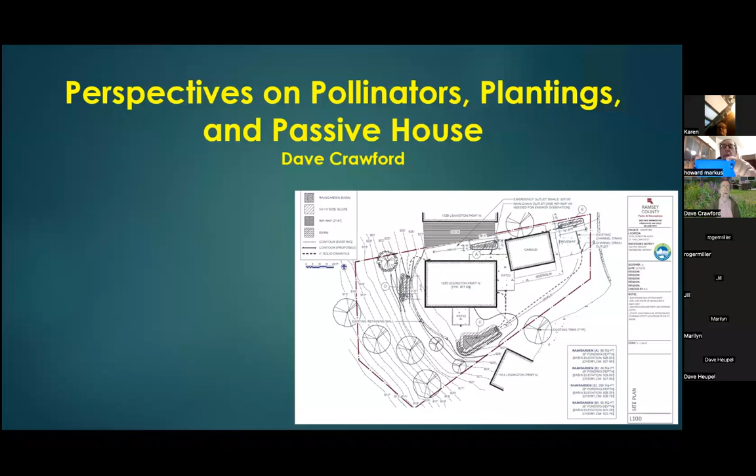The house that my wife and I built, finished building about 3 years ago, has a working name, Lexington Parkway Passive House, and more on that as we go along. I'm also going to be talking about the native plant gardens that we've installed on the property, and in particular the first step of that was installing rain gardens, which was part of the plan from the very beginning.

But then, just last year in the fall, we did an additional project to landscape the slope that runs down to Lexington Parkway. And I'm also going to feature some pollinators. So that's the layout of the talk.

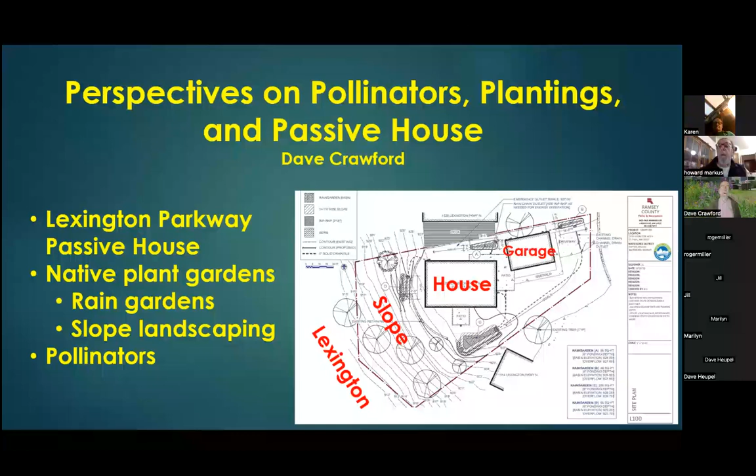Just to give you a layout of the landscape, Lexington Parkway is just at the bottom of the lot, down a hill about 14 feet from the elevation the house is at. That slope is marked here, and the house and the garage are marked, so you get an idea of what the lot looks like. It's pie wedge shaped and offers some really intriguing opportunities for landscaping, and some challenges.

The house itself is unlike anything else in the neighborhood. We were a little concerned about that at first — as we were planning it, were the neighbors going to think it's too garish or too rectangular or too odd? So far, nobody has said that to us. Many people have said, 'Ooh, I really like that fuchsia trim with that green siding,' which kind of confounded our architect, because he thought it might be a little too loud. But he's grown into liking it, and he may feature it as a choice for future customers.

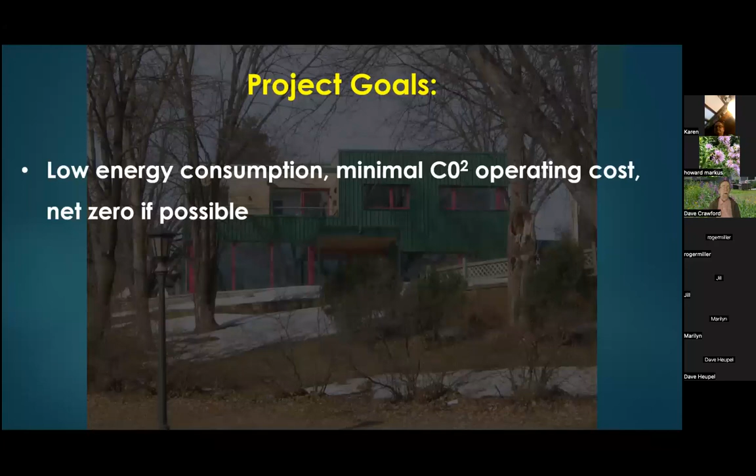As we moved into this project — and I'll tell you a little bit about how we came to be here later — the goals that my wife and I had for this project were primarily: first, low energy consumption, minimum operating cost in terms of CO2 emissions, net zero energy consumption if possible, which is a pretty high standard to meet in Minnesota's climate. We also wanted to design in order to be able to age in place, so the house is designed for as universal accessibility as was prudent for us.

We could have gone way overboard with that, but we had a consultant who said, here are the things you really need, so do these first. We wanted to build the project using materials with reduced environmental impact, so not only would our operating cost be low CO2 emissions and low energy consumption, but the production of the materials for the house should also, as much as possible, meet that goal.

We wanted ample natural light in all of the living spaces, which is easy to do when you have a lot of big windows. We wanted to use materials that were easy to maintain, so ideally, we hope not to have to do any major things like repainting or re-roofing during the time that we live here.

And then outdoors, we wanted the best management for runoff retention. It's especially apparent to me that we should not be building homes and shopping centers and so on in such a way that all the groundwater has to be channeled away into storm sewers and end up in surface waters. We should be retaining as much of that runoff on the site as possible for the good of the site and also for the good of surface water.

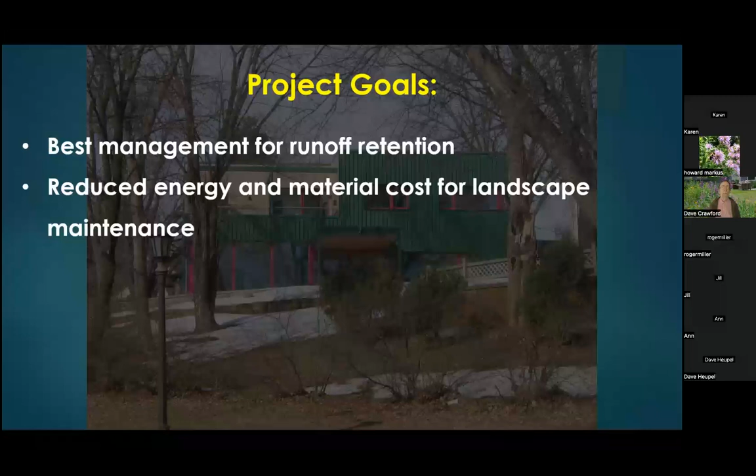We wanted to be able to maintain a landscape with minimum effort in terms of energy, time, and material. We wanted the landscape to be beneficial, not just look nice to us, but provide habitat for wildlife, particularly for pollinators. And overall, we wanted to set a good example for others. We fully intended from the very beginning that part of why we were doing this project was to provide tours and outreach so that other people could see our example and learn from it.

So, definition of passive house. It's a voluntary certification—think of LEED Platinum, for instance—a very high standard of energy efficiency. Passive house calls for reducing the ecological footprint of the building. Passive house compliant buildings have ultra low energy consumption, and the lion's share of energy consumption in this climate especially is space heating and cooling. So passive houses are designed to minimize the cost of doing those things.

There are two organizations that certify passive houses, and they are separate from each other, although the Passive House Institute US is a descendant of the original, the Passive House Institute.

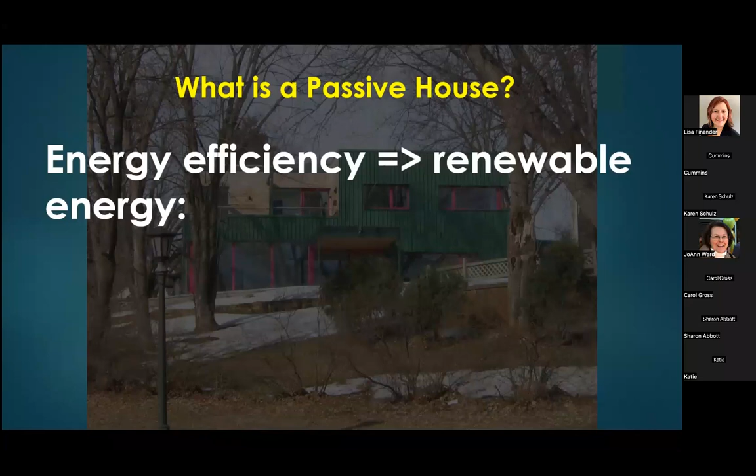The idea is that if you have reduced energy demand, you're going to have a reduced need for energy production, and that's going to have a number of snowball effects. There will be less need to build lots of transmission lines, and less need to occupy the landscape with large facilities for energy production, including solar. If we could reduce the amount of energy consumed in every building, we could get by with a lot less disturbance of the landscape and a lot less carbon problems as well.

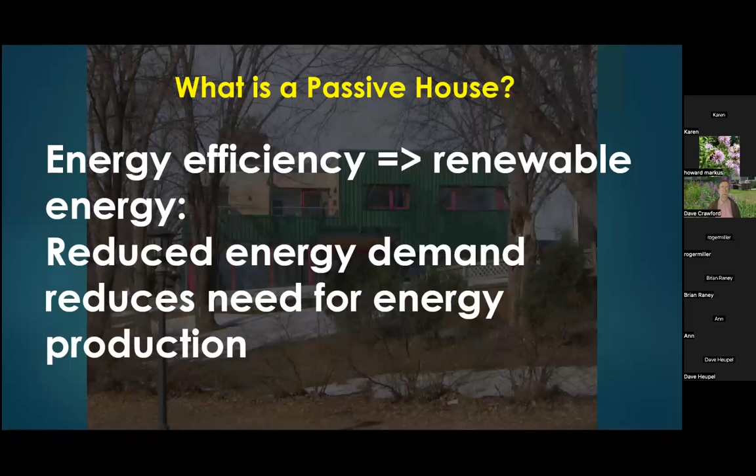So how I got started on this: before I was married, in the 1980s, I was planning a house in rural Wisconsin, which I ultimately built and called Oak House, because the siding, the sheathing, and the subfloors were all made with rough cut oak lumber from a local sawmill. It was remainders, left over from batches that people had not purchased all of the wood. So I got it at a very good price and built a house out of oak for a ridiculously low price per board foot.

In the hard winter, yeah, I did have to heat. So that was my initial experience, and I was very pleased with the results.

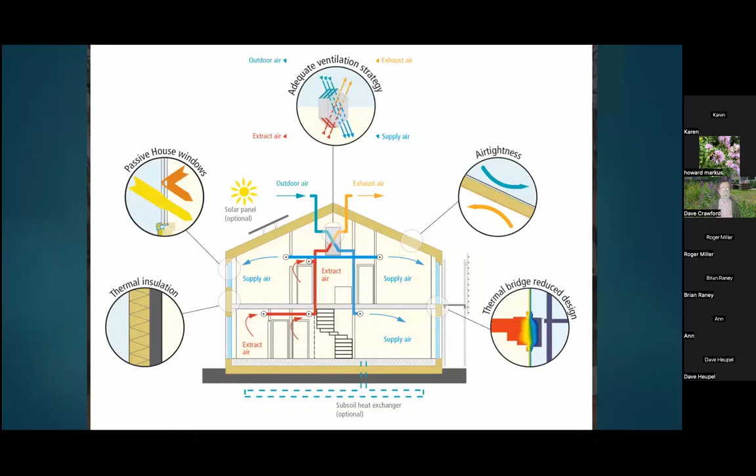So Passive House stands on 5 pretty critical steps: thermal insulation, passive house windows, and so on. But in general, instead of relying on fuel burning heating systems, the idea is to use passive heat gain and to minimize heat loss, or during the hot season, minimize heat gain. So all of those different pieces come together to do that. And I'm going to explain them in a little bit more detail.

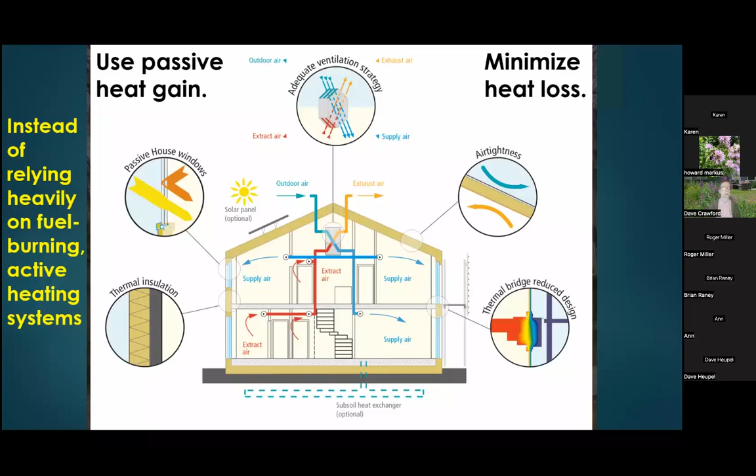But first, around 2011, we were looking for a lot on which we could build, and we were having a hard time.

We wanted to live in St. Paul because we have some connections in St. Paul that are important to us. And it's hard to find a vacant lot in St. Paul. So we started looking at older homes with the idea that if we found one that was a real wreck, we would not feel bad about tearing it down and building something in its place. And what we ultimately found after months and months and months of looking was a house that wasn't a wreck.

It was a 1948 Rambler that was in quite good condition, but it was selling for extremely low cost because of tax delinquency, I think.

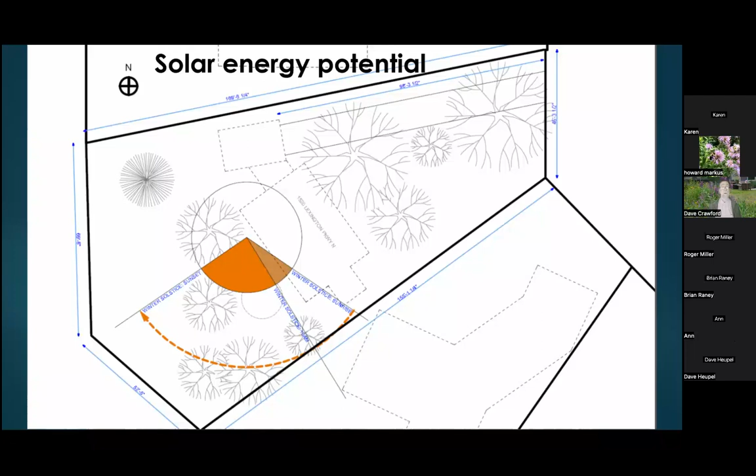And so we invited Tim Ian to come to the lot and give us his assessment of what's the solar energy potential for this location. And he said, it's great. And so we said, all right, let's start planning a house.

And the house is oriented so that the widest face points due south, and solar input through those south windows is extremely effective during the leaf off season. So it fully meets the needs for a house site for a passive house to be able to harvest that passive solar energy.

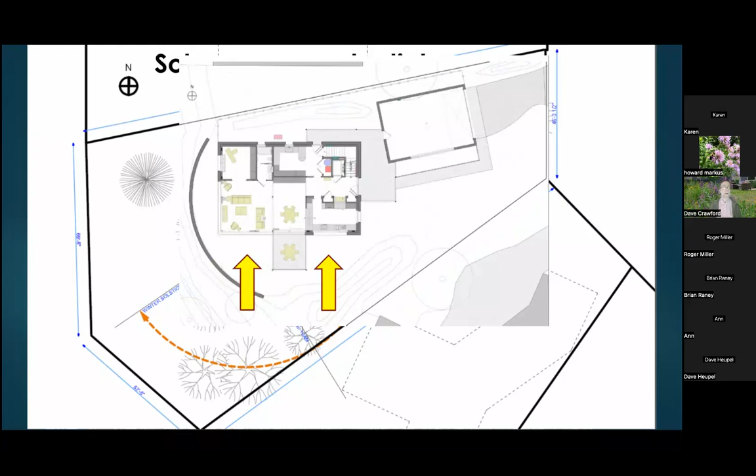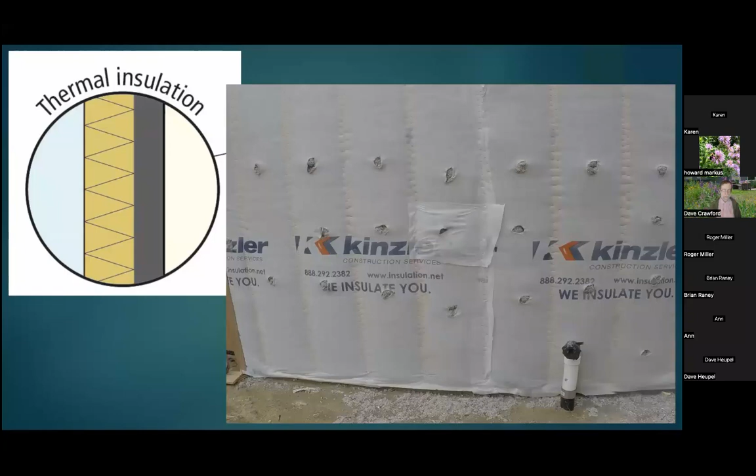And then the next piece of the puzzle is those 5 qualities of a passive house, thermal insulation being one of them. I thought it was impressive when I built my house in Wisconsin to have walls that were insulated 12 inches thick. For this house, we ended up with walls 18 inches thick, insulated with dense packed cellulose.

It's essentially a repurposed product which has minimal to zero negative environmental impact and makes a really good insulation. Much better than the old way of just blowing in cellulose and not packing it densely, which tended to result in settling and many of the insulation cavities then not being insulated all the way up.

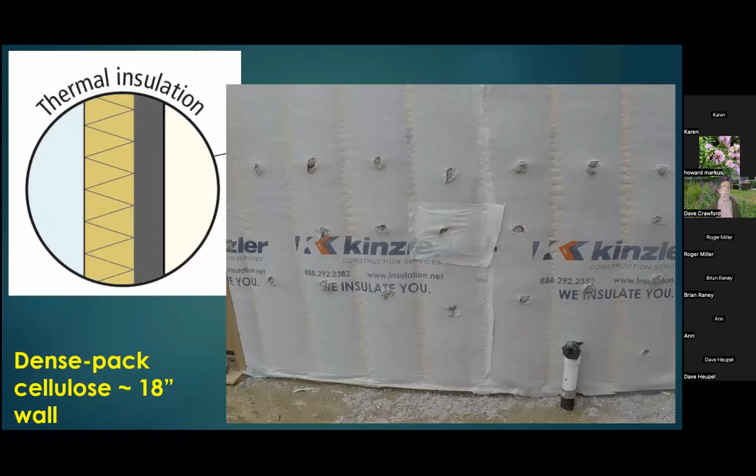So the walls are super insulated, and really it's the entire building envelope, not just above ground, but below ground as well. So the frost footings, the bottom of them is more than 4 feet underground, and they have a layer of expanded polystyrene foam insulation underneath them. So they actually sit on a layer of insulation, and it's pretty heavy duty stuff because it takes the weight of the entire house and doesn't compress.

And then the stem walls, and that insulation under the footing has an R value of about R16, which is the same R value as a 6-inch thick wall insulated with fiberglass batting. And that's just underground, where most people don't even bother to insulate. But this is a passive house, it's got to be done this way, otherwise you don't get the certification. The stem walls were insulated on the outside with R32, so twice as thick as the insulation on the inside, which was R16. So essentially the entire foundation of the house is encapsulated in foam insulation.

The floor slab—we did not build a basement. We built a 2-story house with no basement so that we would have daylight in every room and solar intake in every room, or at least all the south-facing rooms.

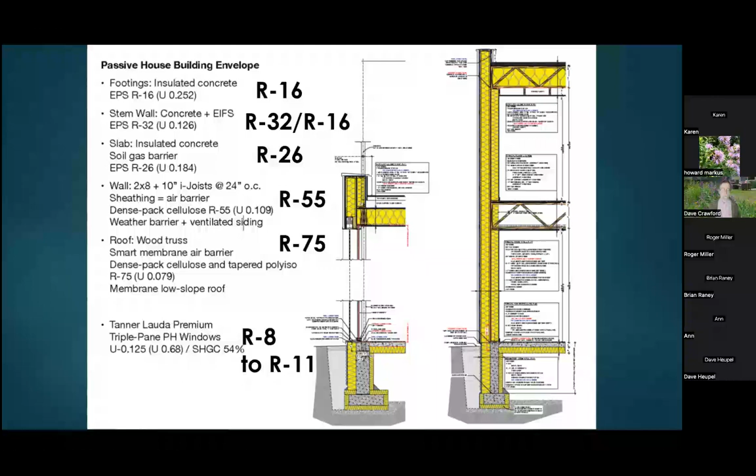And then the windows are an especially important feature because we have so many of them, for one thing. It is not possible to get a window that is good enough for a passive house in Minnesota unless you order it from Europe, because no manufacturer in North America, as of the time we built this house, was yet making windows with the energy efficiency that passive house certification requires.

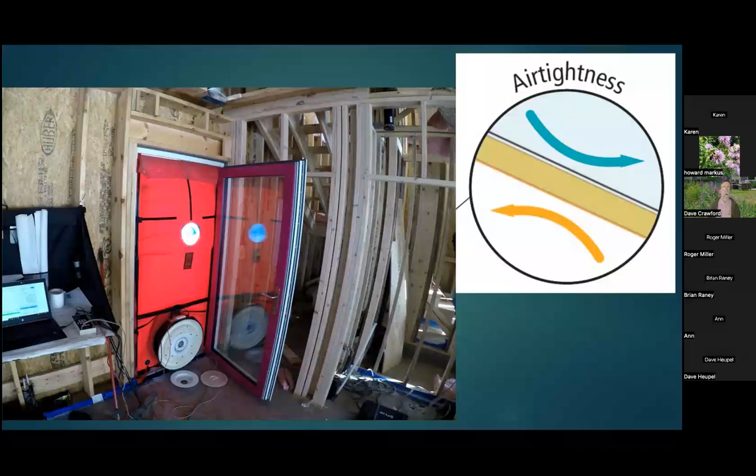And the next factor is airtightness. It's now policy in new construction to make buildings very airtight so that there's not any unmanaged exchange of indoor conditioned air with outdoor unconditioned air. For us, we had actually 3 blower door tests done at different stages of construction, where the house was reduced in pressure a bit by exhausting air from the house. That's what this red membrane with the fan at the bottom of it is for. You exhaust air from the house, and then you walk around and look for places where air infiltrates.

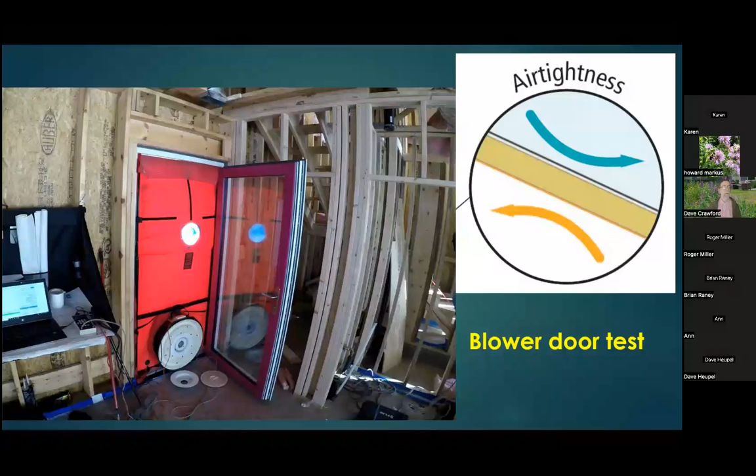Now, what we had as an airtight layer—if you look at the top left of this image, in an oval tilted 90 degrees, there's the word Huber. That's the manufacturer of a system of house sheathing, which has an outer layer that's airtight. The sheets of that material are sealed to each other with an airtight tape. So the entire house becomes essentially a balloon.

Then, once you've depressurized the house a little bit, you look for places where cold air is leaking in. With an infrared camera, you're looking for colors in the purple and blue range—those are cold areas. You see that vertical bluish purple bar on the display near the right side? That's the frame of one of the windows. The window frames are probably the biggest energy leak. And then just to the left of that, inside that oval, there's a dark spot—that's where air is infiltrating through all 18 inches of the wall.

Because of the way the wall was put together, there's always a few little gaps between elements that leak a tiny bit of air. In order to make passive house certification, you look for every one of those little leaks and you plug them up. The idea is to get as close to zero air infiltration as possible.

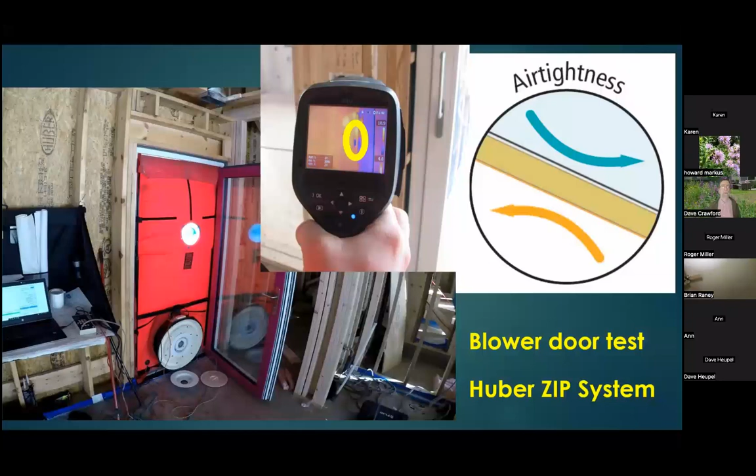So in order to meet passive house certification, we had to have 0.6 air changes per hour at a pressure difference of 50 pascals. 50 pascals is a negligible pressure—it's like between 1 and 2 hundredths of an inch on a typical barometric pressure. What we achieved was 0.38 air changes per hour at 50 pascals, so we definitely made it within the requirement for passive house certification.

To compare that with conventional construction, Minnesota code requires that all houses have less than 3 air changes per hour, 3.0 air changes per hour at 50 pascals. We exceeded that by 7.5 times—we're 7.5 times more airtight than required by Minnesota code. And this is good because it will drastically reduce our heating and cooling costs.

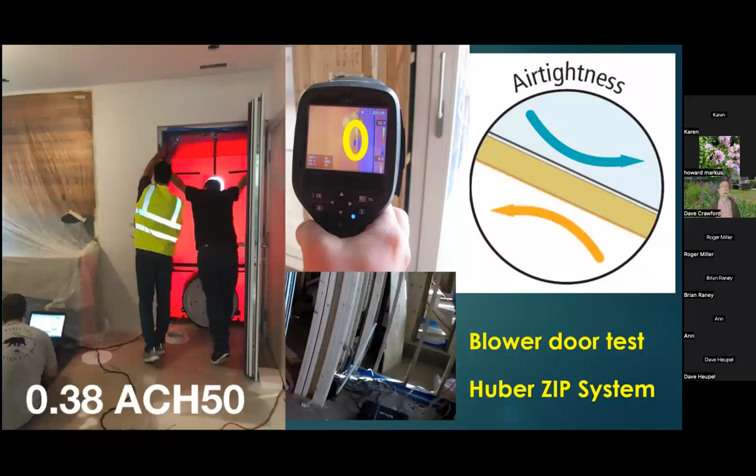Another piece to reduce heating and cooling costs is to avoid creating thermal bridges. For instance, having a structural element of the house that is exposed inside the house and exposed at its other end outside the house. Putting insulation around all of the concrete is one way to avoid that, but we had to go a step further. There's this notch along the side of the house where a door is going to be, and a typical outdoor entrance to a house has a sidewalk slab running up to it.

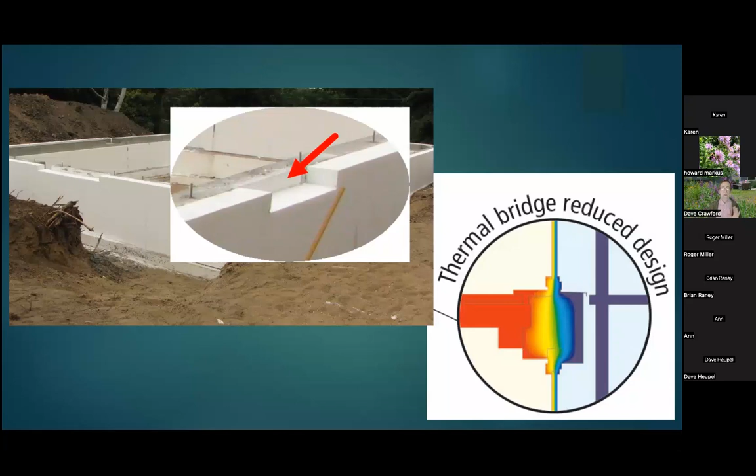And in conventional construction, that slab butts directly against the concrete foundation wall of the house, which means that it conducts heat from the entire length of that concrete slab to the foundation of the house and therefore into the house. And that's not allowed with passive house design. So there's an inset of insulation that separates the sidewalk slab from the house foundation. And that gets rid of that thermal bridge.

Then the windows, as I mentioned, can't buy these or can't find them from North American manufacturers. They're a typical low E glass. Sunlight comes through, but the infrared re-radiation as that sunlight hits surfaces and re-radiates as heat, that heat doesn't go back out through the window with any ease.

And the windows are triple glazed. They have inert gas in between the panes. They have triple seals on the windows that are operable. And they're extremely weather tight, extremely airtight. And they even have insulation elements built into the framing in order to keep the frames from being a really good thermal bridge. And they deliver a performance that's really amazing.

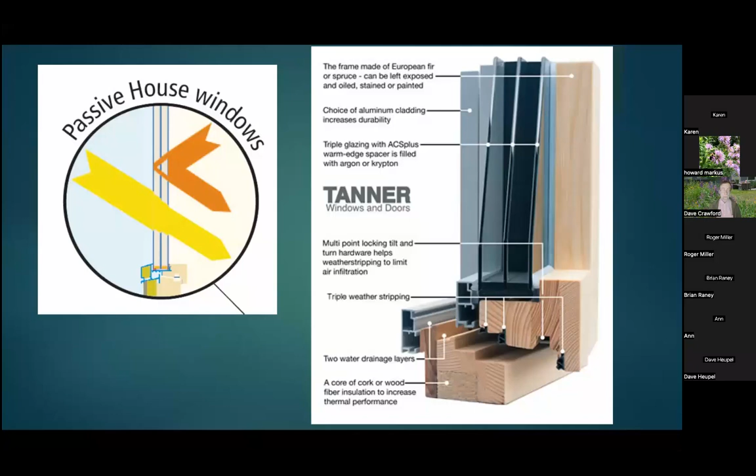We, in our first winter here, checked how the windows were performing one night when the air temperature outside was minus 25 Fahrenheit. And the inside surface of the windows measured above 60 degrees Fahrenheit with a contact thermometer. So the sensation standing next to the window was not, gosh, I'm standing next to a really cold window and I want to move away from it. It was more, this is really nice.

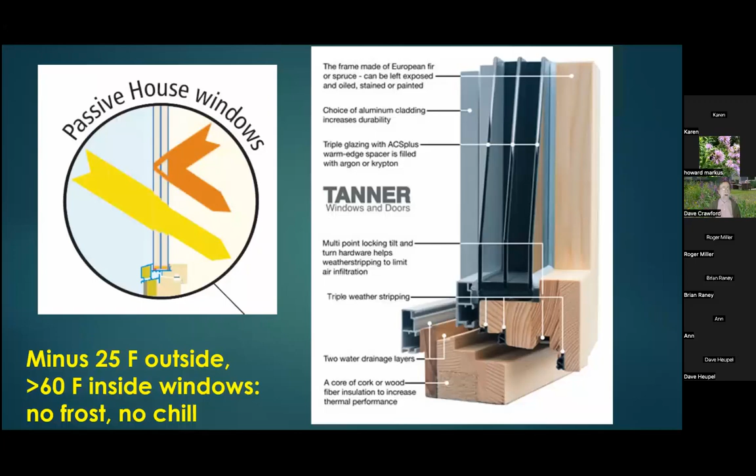This is extremely comfortable. We never get frost on the inside of the windows. We never feel a chill when we're close to the windows. We hardly ever even get any condensation on the inside of the windows. And that's a huge contrast with the triple pane windows that we had at our old house in White Bear Lake, which would frost up every night. And so we're very happy with the performance of these kind of hard to get windows.

And then because the house is so well sealed, it requires air exchange. And you don't just want to suck in outdoor air and blow it indoors, because then you're blowing outdoor temperatures indoors. So there's an air-to-air heat exchange device. And these are in standard construction as well as in passive house. But the ones for passive house are extremely efficient.

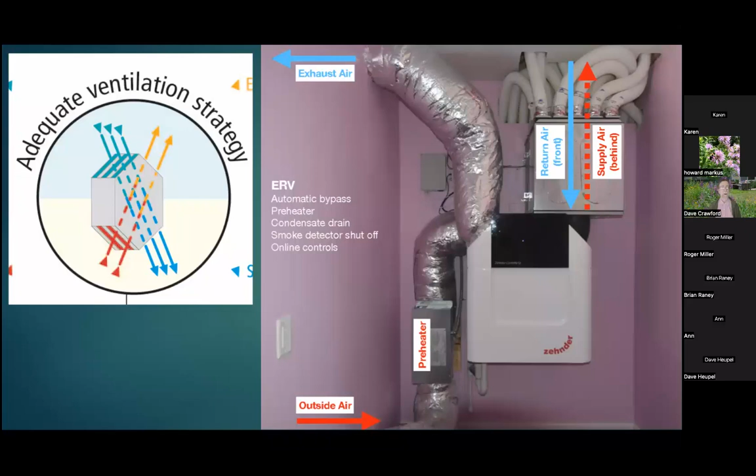But I do want to say that the fresh air equivalent of having this system running, and it runs absolutely silently, and it moves air to and from every room in the house, the fresh air equivalent is the equivalent of opening all the windows in the house for a half an hour every 3 hours, which means the air quality in this house is probably a lot better than any house I've ever lived in, and that's without sacrificing temperature because of a leaky house.

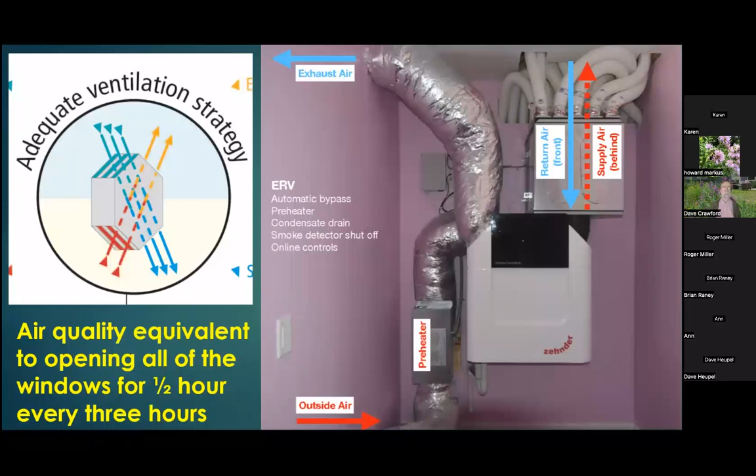Another factor in passive houses, you are not allowed to have any fossil fuel burning inside the house at all. That, for one thing, requires that you have an exhaust to get rid of the combustion products, and that compromises your airtightness. And you also need an intake to bring combustion air in to have flaming gas or flaming oil or whatever as a heat source. And so the house is heated and cooled entirely with electricity.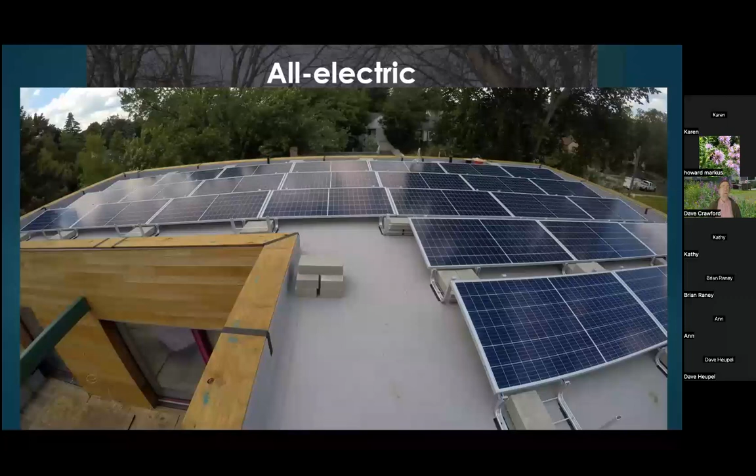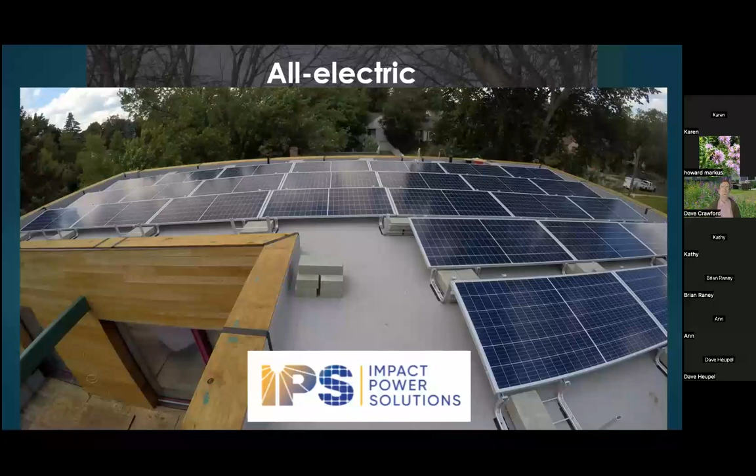Our installer for that was Impact Power Solutions. They no longer do residential installations. I think we were one of the last ones they did before they went entirely to commercial installations only. And the performance for this was exactly what we asked for.

Our electric bill for the first 12 months that we were in this house, running everything, heating, cooling, appliances, lighting, stereo, everything, was about $150 for the entire 12 months. So like $12 a month is what it costs to operate this house.

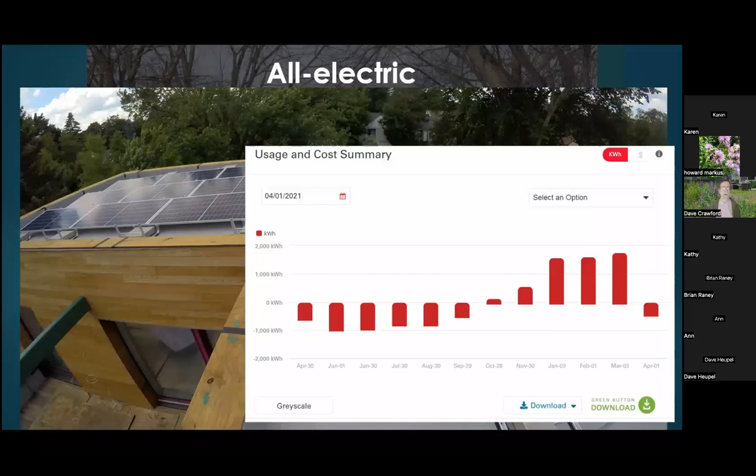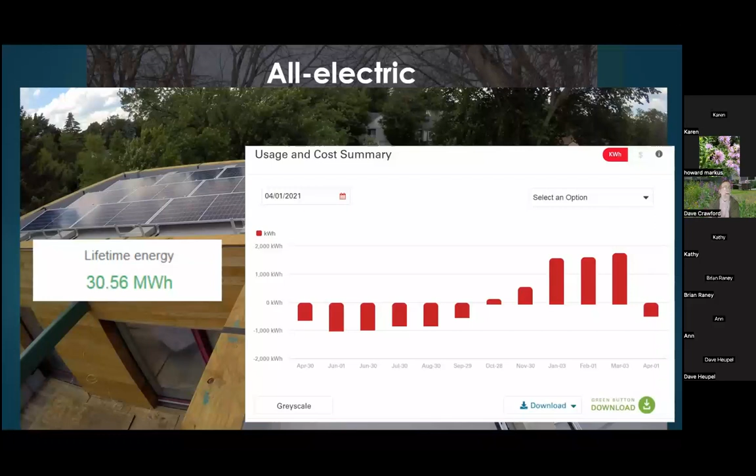Meanwhile, the solar utility, there's an app that you can look at on a cell phone or a computer that shows you how your solar panel system is performing. And right up to the end of January of 2023, we had produced 30 megawatt hours of energy and saved 47,000 pounds of CO2 emissions and planted the equivalent of 357.5 trees.

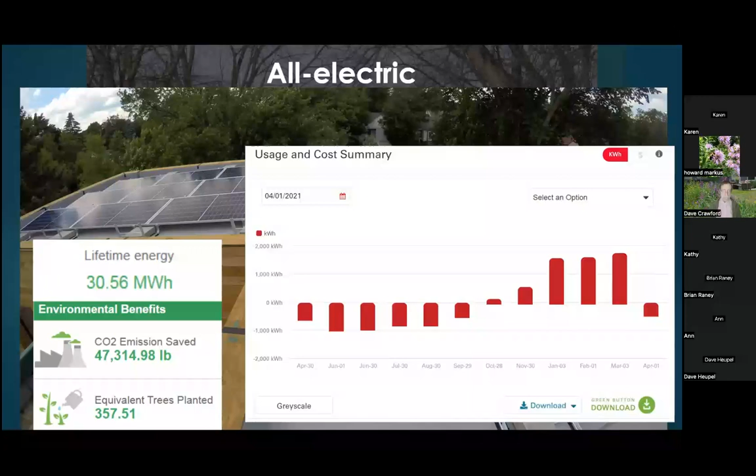And then, whoops, there we go. It's taking a moment to bring this up. We got our Passive House certification from the Passive House Institute in Europe. And because of the solar panels offsetting all of our energy consumption, we ended up receiving Passive House Plus certification. What that means is that the house does offset its energy consumption, most of it, in our case, virtually all of it. And that's an extra bonus. It's like, okay, we're trying for net zero, and we made it.

So we ended up being the first certified passive house built in the city of St. Paul. And we also ended up being only the second house in the United States to get Passive House Plus certification. So we are definitely early adopters of technology. And we did this because we wanted to be part of that group of people that inspired others to think about doing the same thing. There's really a lot of good reasons why all new construction should be this energy efficient. And the cost of doing this is not all that expensive compared to conventional construction.

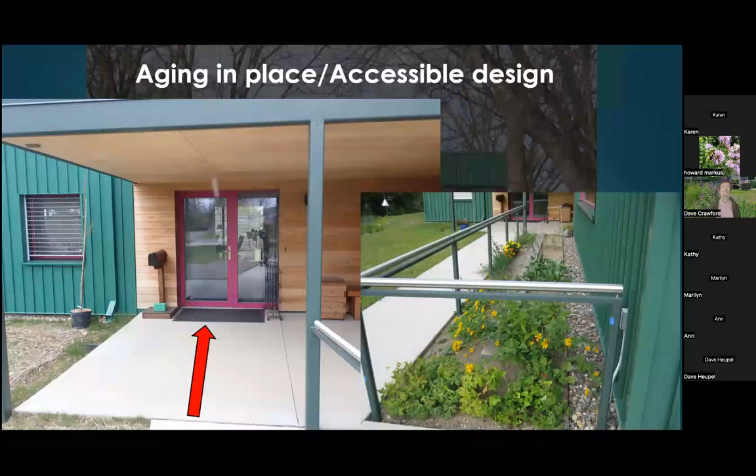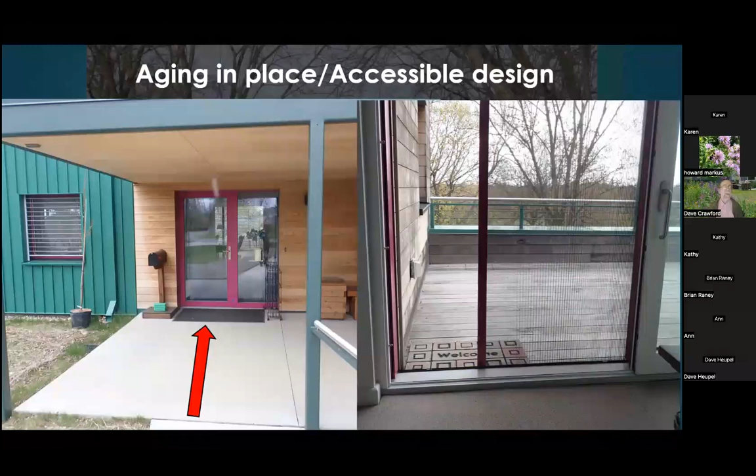And then another feature is that from the get-go, we said we're going to have an elevator in the house. Even if we don't use it, we'll use it as a closet if we have to, but we're going to build the house with an elevator already in it. So if there's any change in our ability to navigate on our own 2 feet, we have the means in place to be able to do that. And in fact, we have used the elevator mainly as a closet. Although we have had guests who have mobility impairments, and we have been really glad that we could take them up to the second floor.

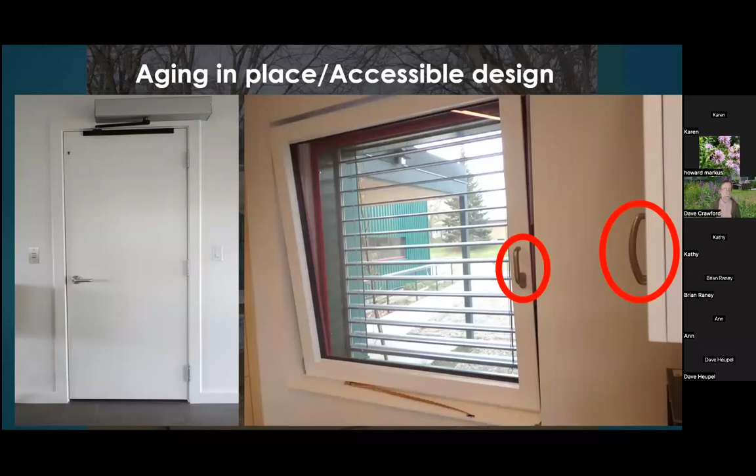As far as other accessibility features, the hardware on all the doors and all the windows and all the cabinets is ADA compliant. So it can be operated by a person who has even very severe arthritis or other difficulties with manipulating objects. And all of the hallways, all of the doorways, all the room dimensions are wheelchair compliant. So there should be no barriers to us continuing to live here, regardless of our physical condition.

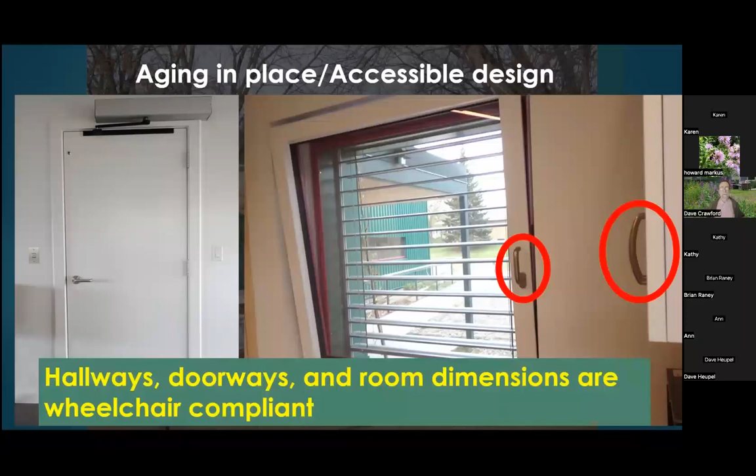Moving on to reduced environmental impact materials, the first thing that we did in that regard was to consider, what are we going to do with the house that's already on the lot?

We didn't want to simply demolish it and have it all be chucked into a landfill. So we hired a company to disassemble it, to deconstruct it. And the result of that was that all of the materials were taken apart and sorted and sent to various destinations where they could be repurposed. So all of the concrete, for instance, from the chimney and the foundation and the slab was ground up and used as aggregate in new construction, as aggregate for new concrete.

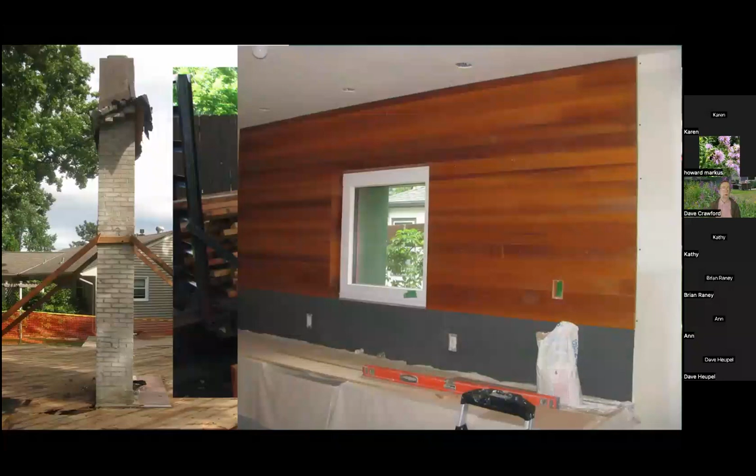70% of the material in the house ended up being repurposed. A fair amount of lumber that was salvaged ended up going to Habitat for Humanity and also to the Franconia Sculpture Park up on the St. Croix River. And we reserved a small amount of the wood to do some interior paneling in our workroom. So we were reusing parts of the original house.

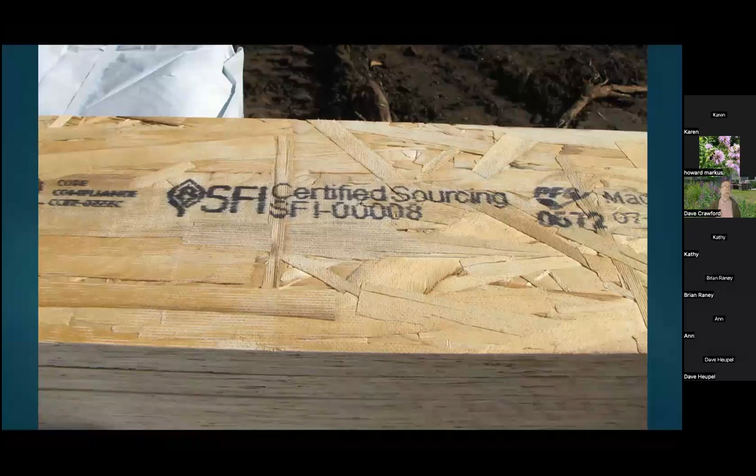And then for new wood, we specified that we wanted Sustainable Forestry Initiative certified wood. That's a project that certifies forest product producers in a way that minimizes or avoids negative social, environmental, and economic impacts. It's not as strict a program as FSC, Forest Stewardship Council. Anyway, it's less strict than that. And it's kind of an in-between.

For us, the cost would be extremely high if we went with FSC certification. So let's step down one and we'll do SFI. And fortunately, anecdotally, we got the house built just before the prices of lumber started to skyrocket, because everybody was building during the early stages of COVID. So we got our timing down pretty well. We didn't know that at the time, but we're glad that we did.

We also were aware that concrete is a big CO2 releaser. During the production of concrete, you have to convert limestone into Portland cement, and that releases a tremendous amount of carbon dioxide. So our designer specified that the concrete used on the project would be minimal content of Portland cement and as much content of fly ash instead, a waste product from coal burning, essentially.

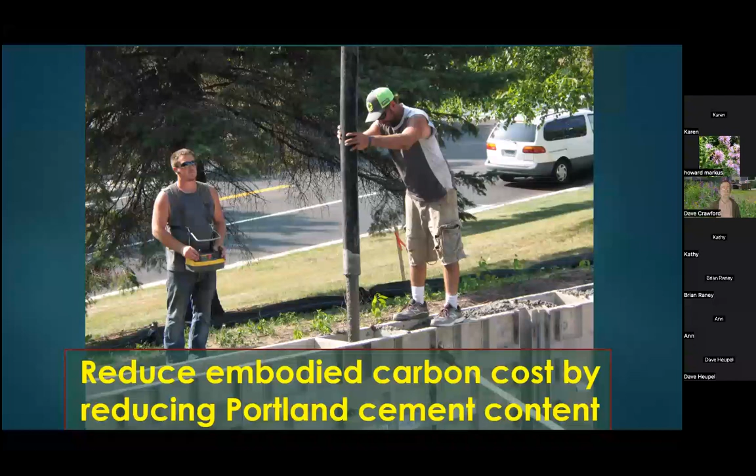For siding, we ultimately went with steel panels. We had the stipulation, we want low maintenance. Steel panels seem to be a good choice for that. And in terms of environmental impact, a steel panel is going to last a lot longer than many other types of siding. So it's not going to have to be replaced as often. And steel paneling is fully recyclable.

What I didn't do during construction was to ask, is the source of the steel that is being made into these standing seam panels recycled steel or is it fresh virgin steel? And I don't know the answer. If I had been paying attention to that, we would have specified recycled steel.

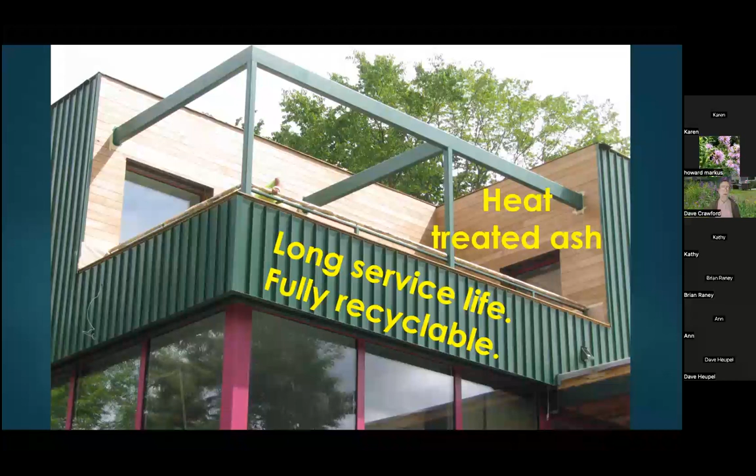For the interior, we used sheetrock, and for floor coverings, the master suite has wool carpeting with a natural jute backing rather than a synthetic petroleum product backing. The majority of the floors are cork, which is sustainably harvested. You can basically take a layer of cork off of a cork oak every 10 years, and that cork oak may live to be 180 years. So it's going to produce many, many square feet of cork over its lifetime.

We used marmoleum in the kitchen and the workroom. That's just a brand of linoleum. Linoleum is plant-based, made from renewable materials, and it's fully biodegradable, so it can be recycled into whatever at the end of its service life. And for high traffic areas and wet areas, we used ceramic tile.

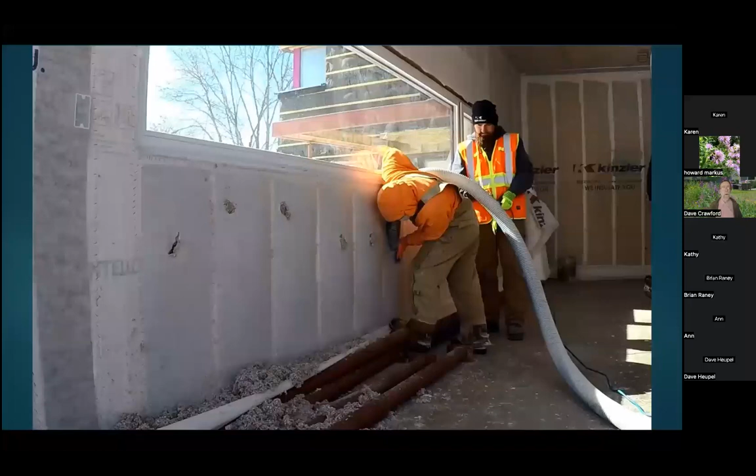Just as an aside, we also insulated our garage, not because our cars needed to be warm in the winter, but because we were thinking in terms of, as time passes and as society changes, it might be really handy to have an extra space that we can condition by heating and cooling if we want to.

And so we went the extra distance and insulated the garage. And our designer said, yeah, what you've just done is build a garage that meets the residential code standards for single family dwellings. It doesn't meet passive house standards, but it's kind of eye-opening that what we thought of as, oh, we'll just do this as a side project, ends up equaling what code requires for energy efficiency, which tells you that code is a long way behind cutting edge right now.

We also have an incredible view. This was a fringe benefit. The house is located right across from Como Golf Course. We were not looking for a great view. We were looking for a good solar exposure, but the lot also has a great view. And our designer said, well, as long as you've got a great view, you should take advantage of it. So he talked us into doing these walls of windows from top to bottom.

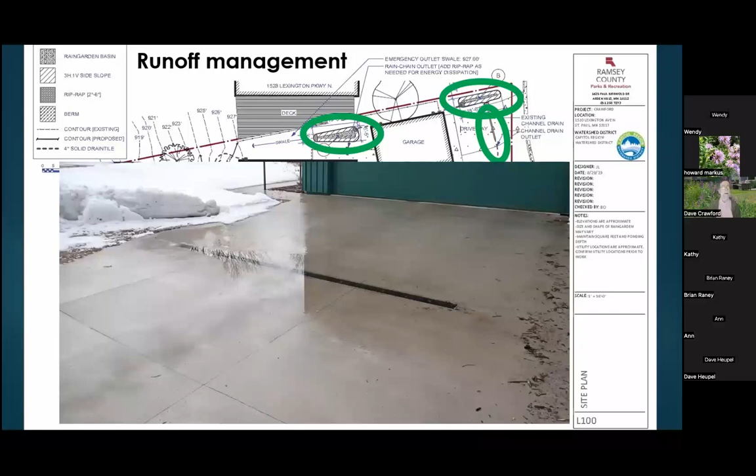So that, plus the fact that a permeable paver driveway requires annual maintenance. You need to pressure wash the gaps between the paving blocks to remove the fine silt that accumulates and blocks water from penetrating. So instead of doing a permeable driveway, we did a driveway with a trench drain; the driveway slab slopes toward that trench drain from the garage and from almost the curb. And all of the water that goes into that trench drain ends up being conducted underground to the south rain garden, the big rain garden in this image. And we've been very satisfied with that system so far. This year was unusual.

We've had this tremendous snow cover, and then, of course, we had warm weather earlier this month, and we had a lot of melt. Water pooled up in the driveway on top of that grating because the trench drain was frozen. But because we had such unseasonably warm weather for so many days in a row, the trench drain thawed out and all the water drained off the driveway. So we don't have a skating rink on our driveway, which was something we knew we might have to put up with. But at least this year, we got lucky on that.

Then there's the problem of, okay, so we've got runoff controlled on the building site, but what about the slope that runs down to Lexington Parkway? We did nothing with that at the beginning, but starting in 2022, we did a project to take care of that particular issue. I'll get into that as we get a little farther along.

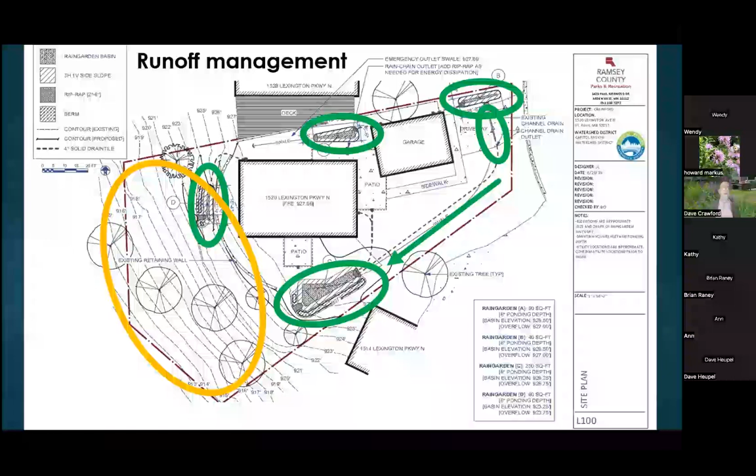Wanted to show you the first step of the rain gardens. In 2020, when we moved in, I planted plugs. Some of the plants flowered, and it was very nice to see. The next year, 2021, things had filled in a lot more. By 2022, it had filled in even more.

And we got a response in the form of, well, we started getting visits from more different species of pollinators than we had been seeing on the property before construction and during construction. So lots of different bees, wasps, flower flies, butterflies and moths, beetles, the whole works. I'm not going to do much detail on those. What I want to do is say that this gave us a real opportunity to document the results of changing a turf grass lot into a native plant garden lot.

So when we were building, and during a good chunk of the first and second year that we've lived here, we had a typical turfgrass lawn that offered some floral resources to pollinators - Dutch white clover, dandelions, black medic, all of the things that TruGreen ChemLawn calls weeds. And we were attracting pollinators, but they were almost exclusively honeybees, which from a native pollinator perspective, you could also call European honeybees weeds, because they compete with the natives for floral resources, and they don't do as good a job of pollinating native plants as the native bees do. So we knew that we could improve on that.

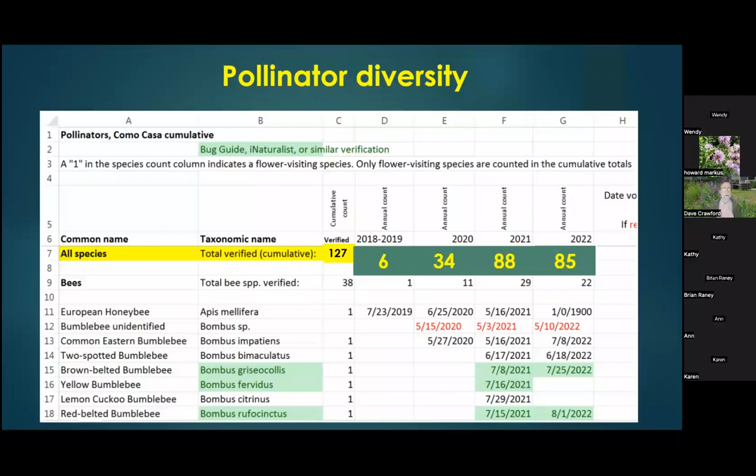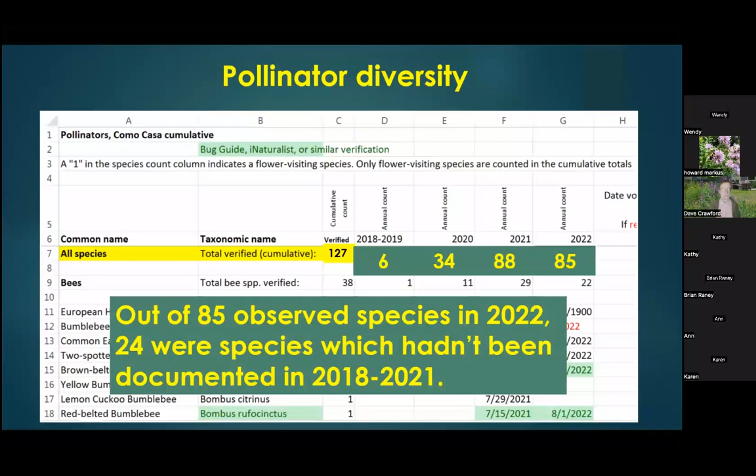Actually, looking at the details, even though we had fewer total species in 2022 than in 2021, 24 of those species in 2022 were first-time occurrences here. So we were attracting additional diversity of species, even though some of the species we had seen before we didn't see again. I'm going to be very interested in 2023 to see if we start an upward trend in total insect species visiting flowers once again.

A few of the firsts that were especially notable in 2022 - one of them was a behavioral thing. I had never before seen an ant guarding a flower in order to keep all of those floral resources for itself. But we had ants that were chasing sweat bees off of our wild geraniums.

And we had a butterfly show up that is not typically seen this far north. This is a type of skipper called a sachem. Their northern range edge is pretty much the Minnesota-Iowa border, but there were a lot of sachems in Minnesota in 2022, and some of them came to us.

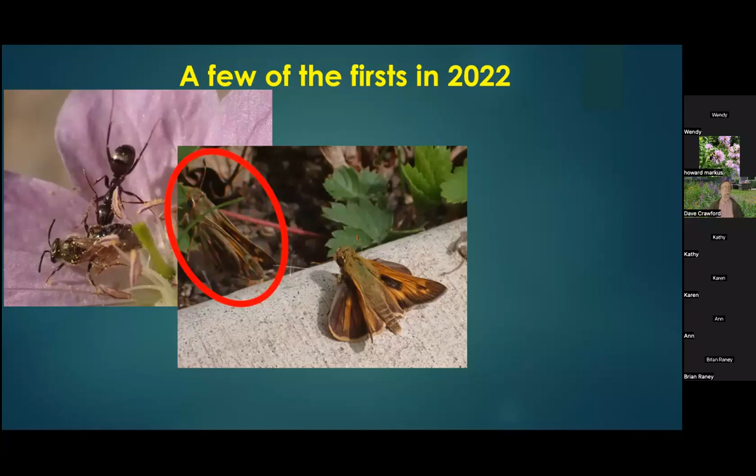This one in the foreground is a male, and he's got his wings spread, displaying his flashy colors. He's doing that because right in front of him there's a female, and he's hoping she'll notice him. And we had another butterfly from further south that also came in.

The American snout is another one that gets into the southern edge of Minnesota, but not so much this far north. I think this is the first time I've seen one in my life, and certainly the first time I've seen a sachem in my life.

One other highlight for me was seeing the first jagged ambush bug. Many people who love pollinators are going to say, wait a minute, you love something that eats pollinators? I do, because the goal of a native plant garden for me is not just to attract pollinators. It is to build a stable, sustainable, and complex ecosystem. And an ecosystem that contains no predators is not exactly sustainable, and it's not particularly complex.

So I predict that the longer we have our gardens established, the more predators we're going to see showing up, because they're taking advantage of the higher concentration of pollinators and other insects attracted by the native plants. They help make the ecosystem more complex and therefore more resilient to change. So I count that as a success.

We also had other critters that adopted our yard as a place to live—chipmunks, rabbits, mice, shrews, all sorts of things. And we're happy about that.

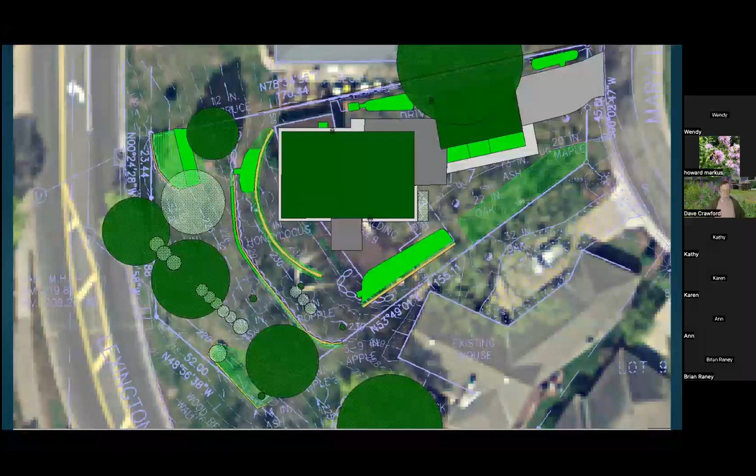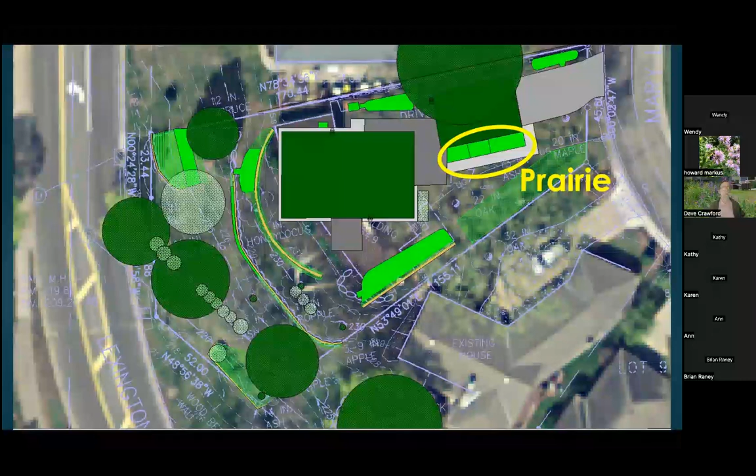Then planning for what else to do. Besides the rain gardens, we put in one prairie garden along the sidewalk to the front door, and really appreciate seeing all the critters that come and use that garden. And we put in a woodland garden down the slope in a spot that had shade from a plantation of non-native crabapple trees, but they flower nicely and attract some bees, so we're leaving them there.

But then we were thinking, okay, we can do more. So in 2021, I planted a number of wildlife shrubs—some American elderberry, a buttonbush, an American wild plum, a downy Juneberry, snowberry, a handful of other things.

And also I planted a black cherry tree, not just for the floral resources that attract pollinators and the berries which attract birds, but the foliage of black cherry is second only to oaks in attracting caterpillars. And caterpillars are the mainstay food for songbirds that are fledging. Since there are already oaks in the neighborhood and not so much black cherry, I thought, all right, we're going to put in a black cherry. It's only about two feet taller than I am right now, but it's going to keep growing.

And then we took a look at that slope down to Lexington Parkway—a very large area, like half of the lot's total surface area is on that slope. A very large area of regularly mowed, compacted, ecologically pretty much blah turf grass. It doesn't hold runoff well. A turf grass lawn sheds water almost as effectively as a slope made of concrete.

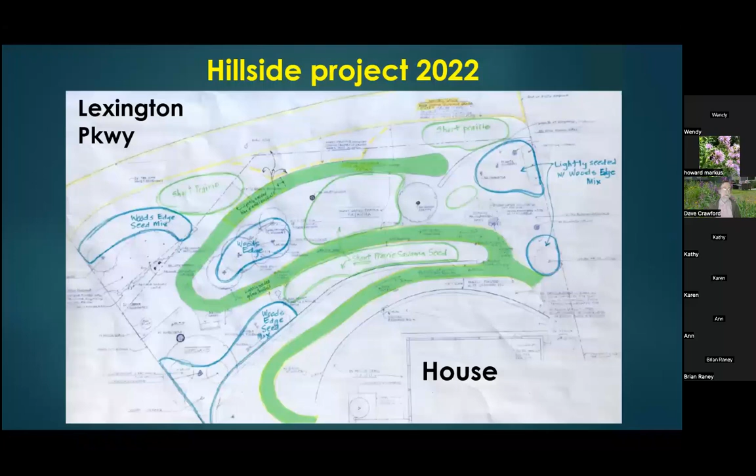So we have hopes that that mixture of grass is going to give us a relatively short stature covering over the path, that maybe we'll mow it once or twice a year and otherwise not. The entire rest of the project area is all native plants, some planted by seed, some with plugs. This began in September last year.

Besides, they were planted in 1948 and were reaching their use-by date. They were leafing out less and less, and looked really scraggly. So one of the first things we wanted was for that to go away. We retained a few trees, as you'll see in the next image.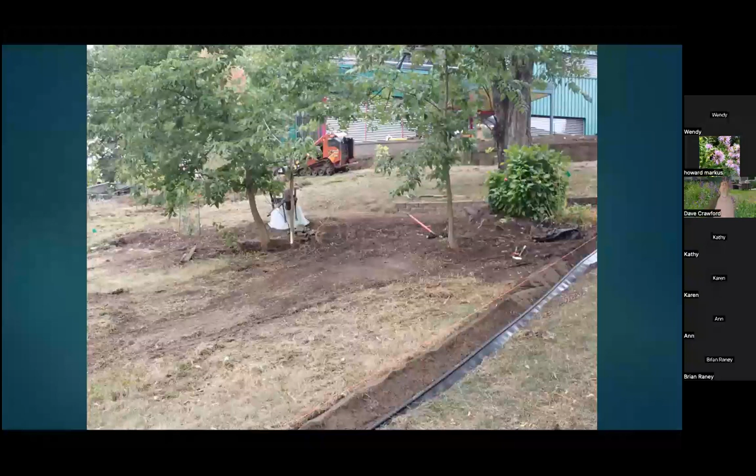The other thing was to kill off the lawn. We had a landscaping company come in and do that for us. They used Roundup, or one brand or another of glyphosate, which, because they're used to doing this for people who want to plant native plants, they're really careful about applying it. Glyphosate is bad stuff, but if it's applied scrupulously, it's limitedly bad.

We didn't see any real future in trying to get a sod cutter and remove essentially 1.5 acres of sod on a hillside, or to blanket the entire hillside with black plastic and wait a year. So we went with the chemical solution.

In addition, you see in the middle ground 3 saplings standing up. Those are 3 hackberries, which we retained out of all the clutter of sprouting tree saplings. There was even an Amur maple in there, which was particularly objectionable because they are invasive.

We had a little bit of garlic mustard in there, which after 2 years I think I finally got to the point where there are no seeds left in the soil. Of course, now the soil's been stirred up quite a bit by this project, so we might see some new sprouts coming up. You can see in the foreground right that there's edging between our lot and the neighbor's lot, so their turf grass will not creep over into our lawn, and some of the plants we're putting in as natives will also try to creep into their lawn. So we're trying to draw a line there to keep things easy for both of us.

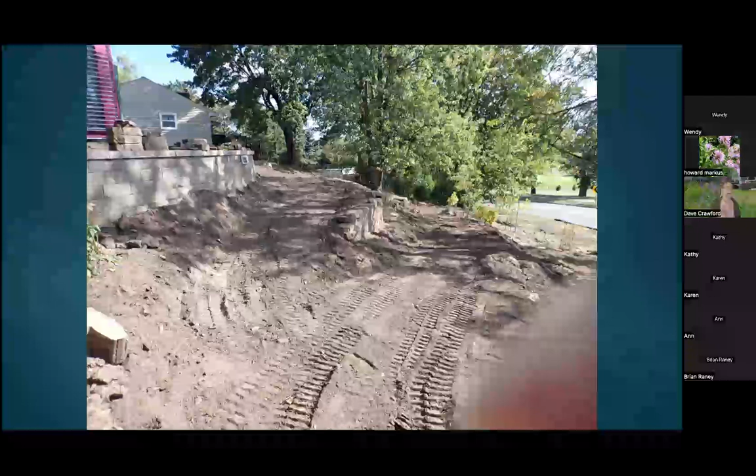Then we started with contouring. This is the beginning of that ADA compliant pathway coming down the hill on the left, then going further down on the right, and then zigzagging back once more parallel to Lexington Parkway in the background.

This is what it looked like when all of the grading was done. Soil was stabilized in spots where it was steep, with a mat of Excelsior wood fiber.

The next step was to have a vendor come in and plant designated seed mixes in designated areas, and then surface coat the entire area with hydromulch, basically a paste that's sprayed onto the ground. It's made from wood fiber, I believe. It kind of smells like peat moss, which is interesting because there isn't peat moss in it.

It's dyed green in this case, apparently because the manufacturer said, wouldn't it be nice for people to be able to green up their lawn immediately? At any rate, the curb effect of that was, hey, instant lawn. And yeah, never mind that it's only a coat of paint and that it's going to be growing with all sorts of other things in the next growing season.

We started doing this project late enough in the year that the seed vendor was saying, well, we want to be sure the soil temperatures are low when we plant the seeds, because we don't want them to break dormancy and then get hit with winter, because that'll kill them. So they wanted to plant the seed while the soil was cool enough that the seed would stay dormant until spring of 2023.